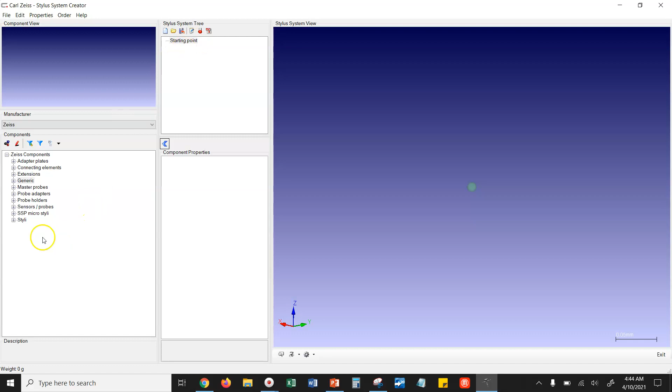Next I need a sensor, so I'll come down here under Zeiss Components and expand Sensors. The only one we have at STCC is the VAST XXT TL3 18p. I'll double click on that and notice that it populates this list up here. Now this is the number one thing that confused me when I tried doing this the first time. Notice it's light gray up here - the VAST XXT TL3 is highlighted. I want to emphasize this: you have to click on the XXT TL3-Z to be able to do the next step.

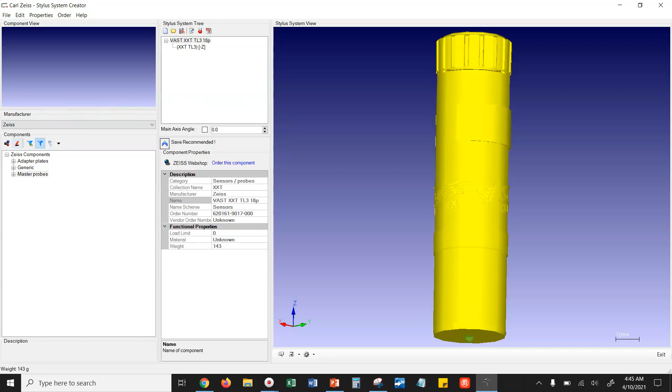I'm going to show you how to do this incorrectly first to show you how it doesn't work. Next we'll come over here to the adapter plate and grab the XXT TL3 adapter plate, and I'll double click on it. Notice that nothing happens. This really confused me - it's a simple fix, but it's not obvious. You have to click on this first right here, and we get a preview on the graphics screen. Then we want to double click on this and it populates.

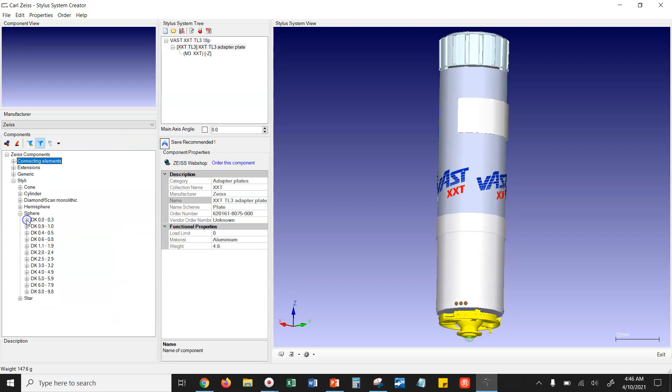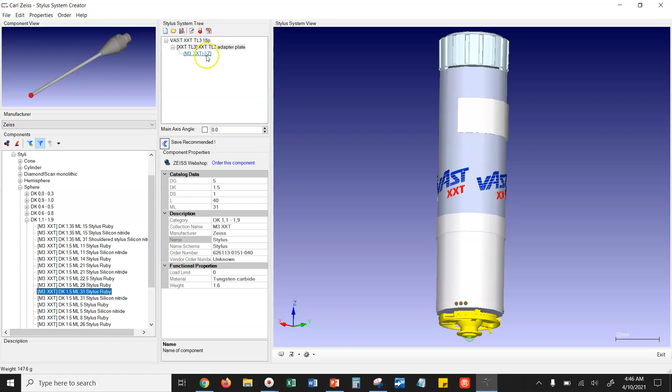Much better. The stylus we're going to build today is one of the styli we actually have in our lab, a 1.5mm by 31mm measuring length. So we'll expand styli and then sphere, and these sort them by different ranges of size. We're looking for a 1.5mm diameter ball, so we'll hit the plus sign here, and the one we want is M3XXT DK 1.5 ML 31 stylus ruby. Again, this is not highlighted in the correct spot, so if I double click on this, nothing happens. You always have to click on the lowest item in the list to get this to work.

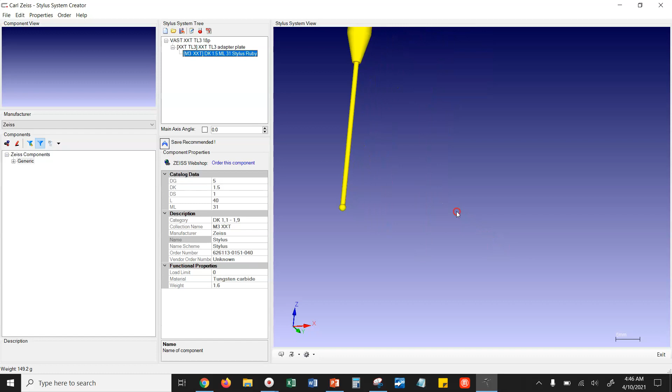So we'll click on that, and then double click on this, and we see the preview in the graphics screen. You can also manipulate your view if you want - looking from -Y would be the front view. You can use the same dynamic controls that you use in Calypso. Just fair warning, there is a bit of delay, especially when you rotate, so for me I usually rotate it way off the screen and lose where I'm at. If that's the case, come down here and do a fit zoom and you're back where you left off, or you can look from a different view. Isometric or front tend to work pretty well there.

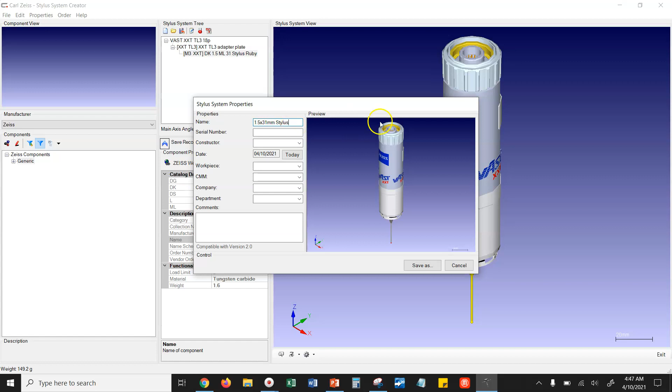Now with all our hard work done, we are just going to come up here to Save Stylus System. The name of this is going to be 1.5 by 31mm stylus. The spelling does matter, and I believe it's case sensitive as well - don't quote me on the case sensitive part, but I know the spelling matters. So we'll hit Save As, and notice that I already have this saved here under Public. Let me get through the full string: it's C Users Public Documents Zeiss Stylus Systems.

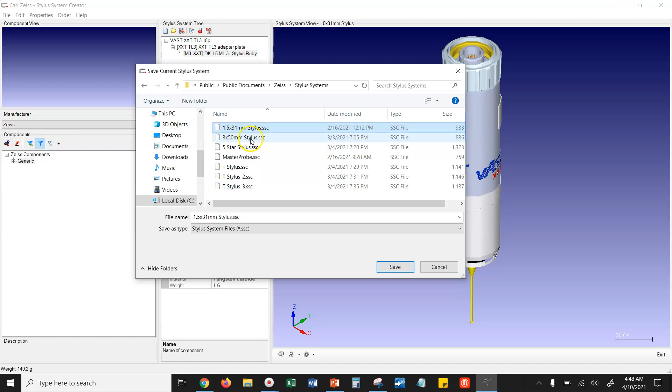If that directory doesn't exist, you can go back to the Zeiss directory, up one level, and create a folder called Stylus Systems. You'll want this name to match exactly, because this is exactly what it's named on STCC's computers. Then you'll hit Save and Cancel.

You'll hit Save and the dialog will go away, so we'll close out of that. I'm not going to save this one since in this case I already have it.

Now we'll come over and launch Calypso. So we created the stylus system, but that doesn't mean we can use it in Calypso yet, because it hasn't been imported. Our next move is to open up any generic measurement plan and import that file from the SSC file.

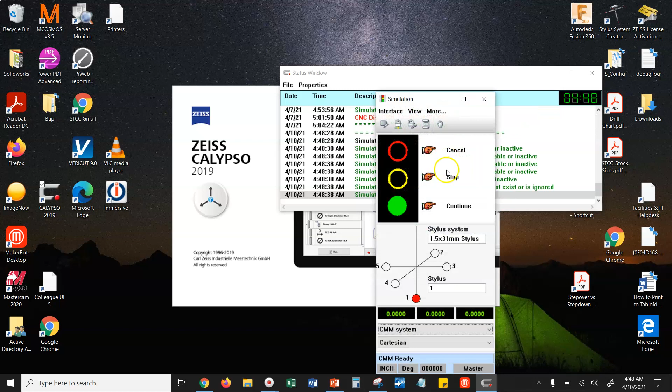We'll come over here to create a new measurement plan, and we'll go Planner, Import SSC file.

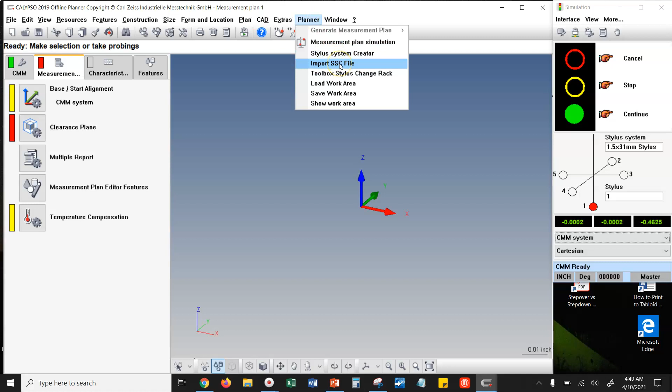This will always have the green check here after you import the initial master probe. If you don't have a green check there, you need to go back and import your master probe to begin with—there's a different video on that.

This will always have some path in it after you load one stylus system, so you're just going to hit load stylus system, click on the one you just created, and this should default to that same location we just saved the probe to before. That's why we wanted to save it there.

If it doesn't default to that location, I'll give you the location again for convenience: it's C users public documents Zeiss stylus systems. That just keeps it organized. Right click on that, click open.

Then you have to hit accept loaded system. That should default to 1.5 by 31 millimeter stylus. All of this up here should be blank, and if it doesn't populate with 1_-Z—again, the spelling does matter there. I believe it's case sensitive, but don't quote me.

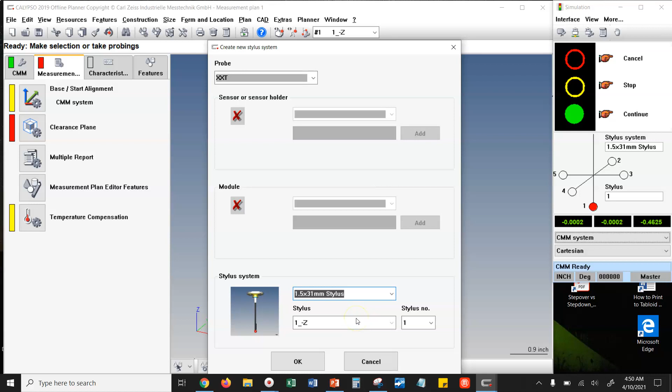If this doesn't say stylus number 1, you want to set that information—it should come in by default. This really is only an issue when you're doing star probes, where you have to make sure that's correct. So we say OK there.

This is giving me an additional prompt: do I want to overwrite or update? I'll just say overwrite and say OK. It says I can't do that because I actually have that particular stylus active right now. But for you, you'll say yes, and then you'll see a little preview of it on the screen.

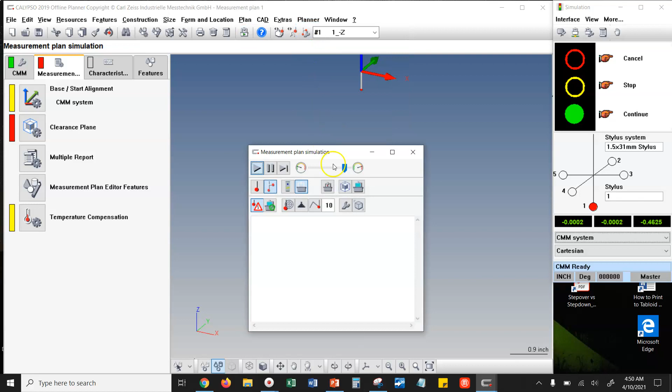One other thing you might want to do is go to Planner and Measurement Plan Simulation, then pull this over here. We do see that we have that same probe we just created—that's the 1.5 by 31 millimeter.

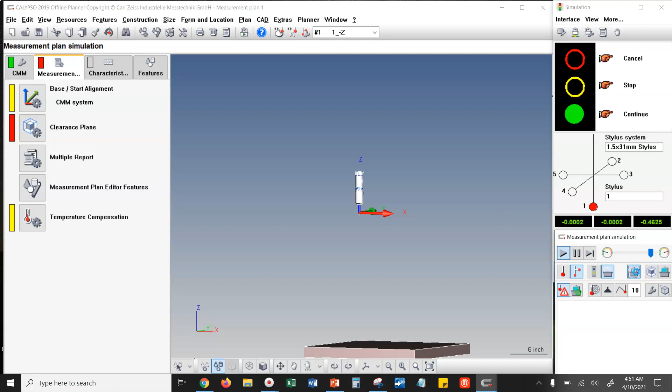If you wanted to see where this is on the machine, I have my base plate shown here. You could also show the entire machine for scale reference. Then we could show the CMM operation dialog box, which looks like a little joystick. We could go into our base alignment and pull these around to see roughly how big this is compared to the scale of the machine.

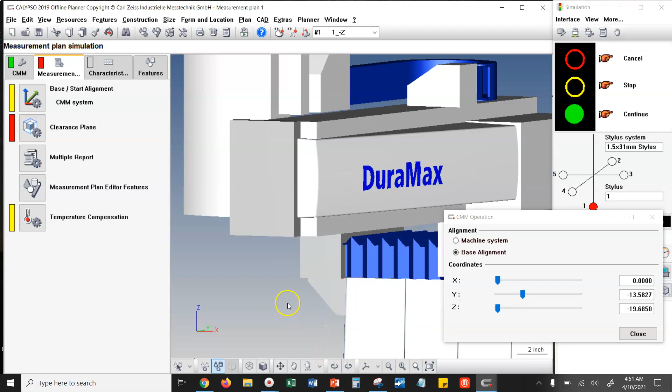You could also import the part and see how big this is relative to the features on the part. The real reason for creating this probe is that in this week's video tutorial, we have to measure some features so small our regular 3 by 50 millimeter probe simply won't fit in there.